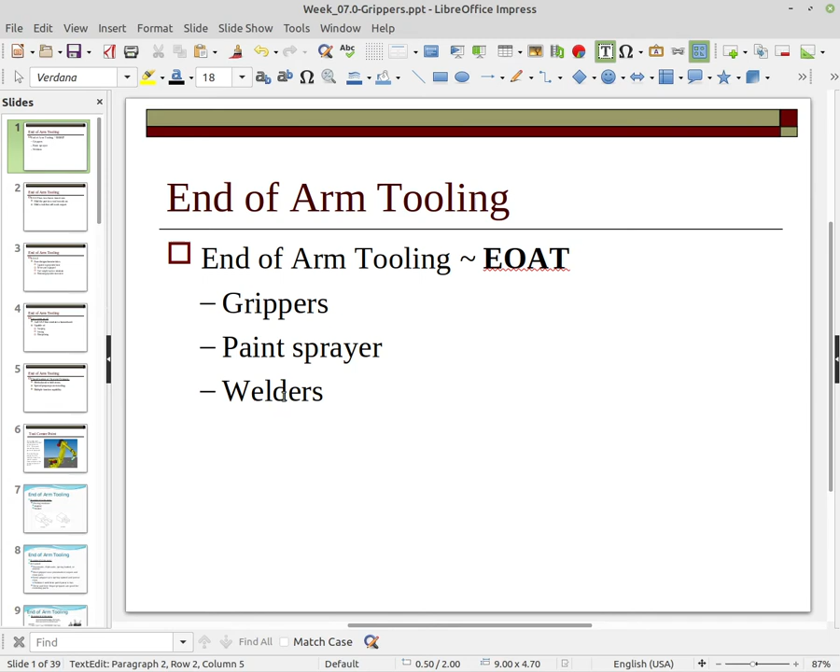This video discusses end-of-arm tooling, or EOAT. Some common types of end-of-arm tooling are grippers, paint sprayers, and welders or welding tips.

The end-of-arm tooling has two basic possible functions. On the one hand, it could hold a tool that is going to work on a part, or it can hold the part that some tool is going to work on. So if it's a welder, the end-of-arm tooling is going to be the welding tip, and it's going to be welding on a part or parts to weld the parts together.

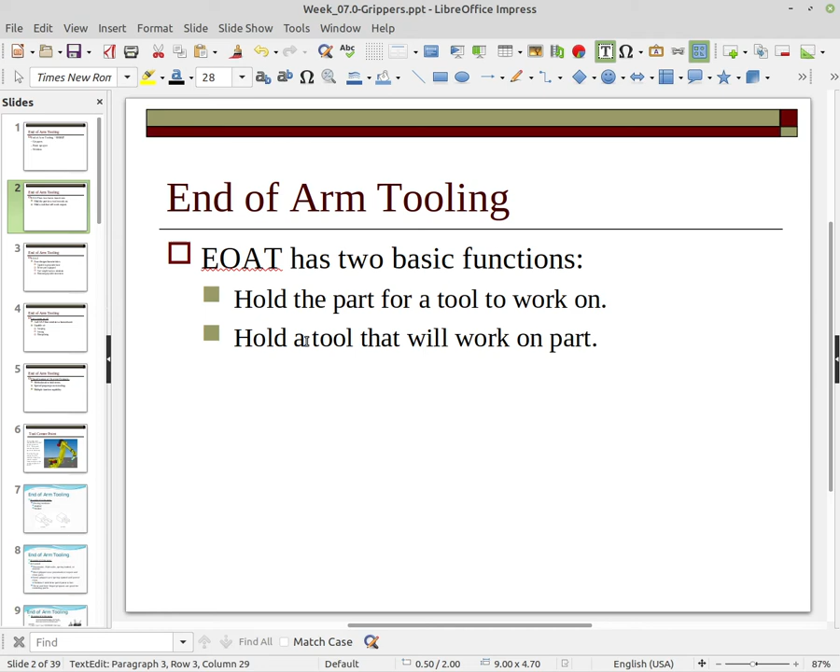In general, there are four different design characteristics that we use specifically for grippers when end-of-arm tooling is a gripper. Those are the capability to grip and release the object, to detect that the part has been gripped, to keep the weight of the tool as low as possible, and to maintain the grip of the object as we're moving. So when we're trying to build a gripper, these are four different characteristics that we would like to see.

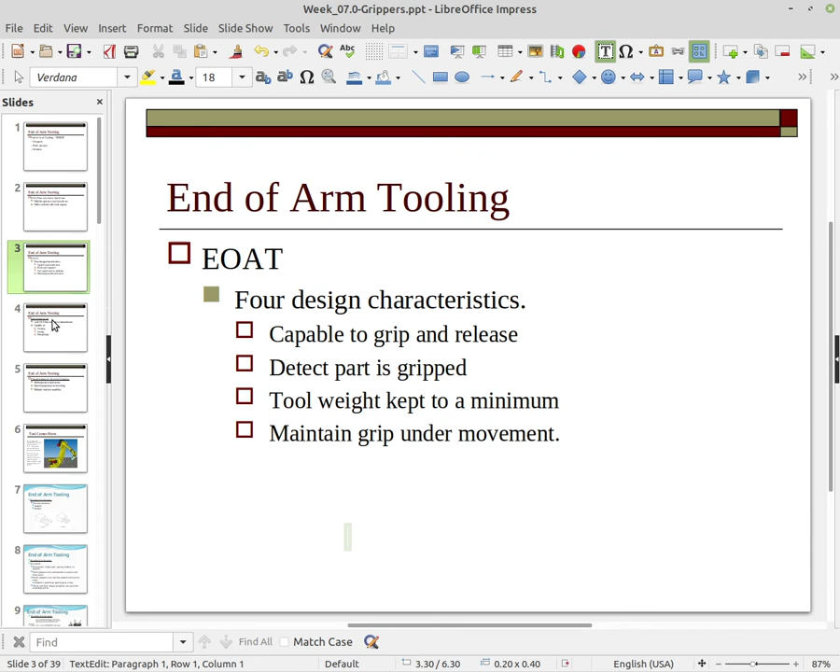Now, I'm not saying that every gripper meets these. I'm just saying these are design characteristics that we would like to build in there long term. Like if you're talking about a gripper especially, we want the end-of-arm tooling to simulate the human hand and all the capabilities you can do with the human hand, which of course is grasping things, but also sensing things and manipulating things.

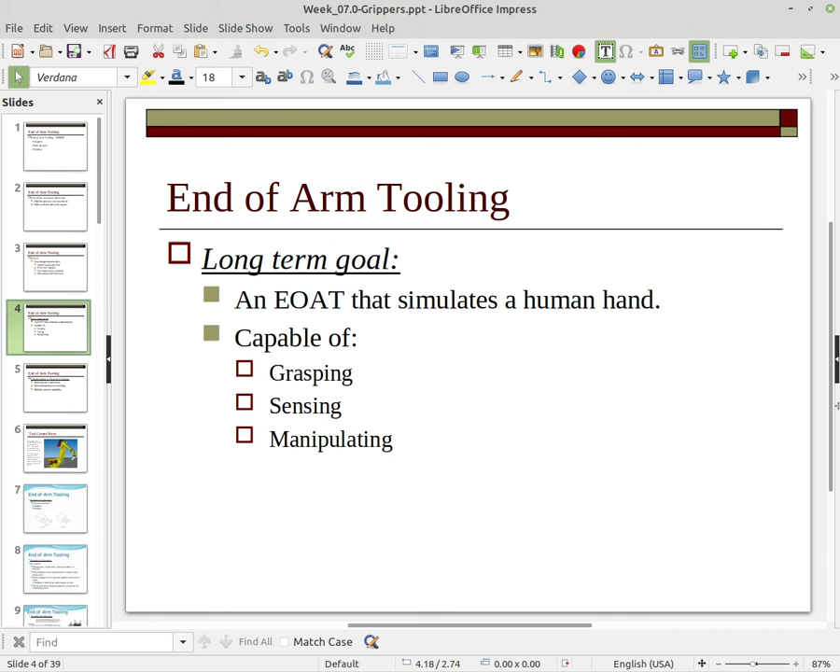So if we're trying to classify different types of grippers, we want to look at the method we're going to use to hold items, any special purpose toolings or sensors, and whether they have possibly multiple function capability.

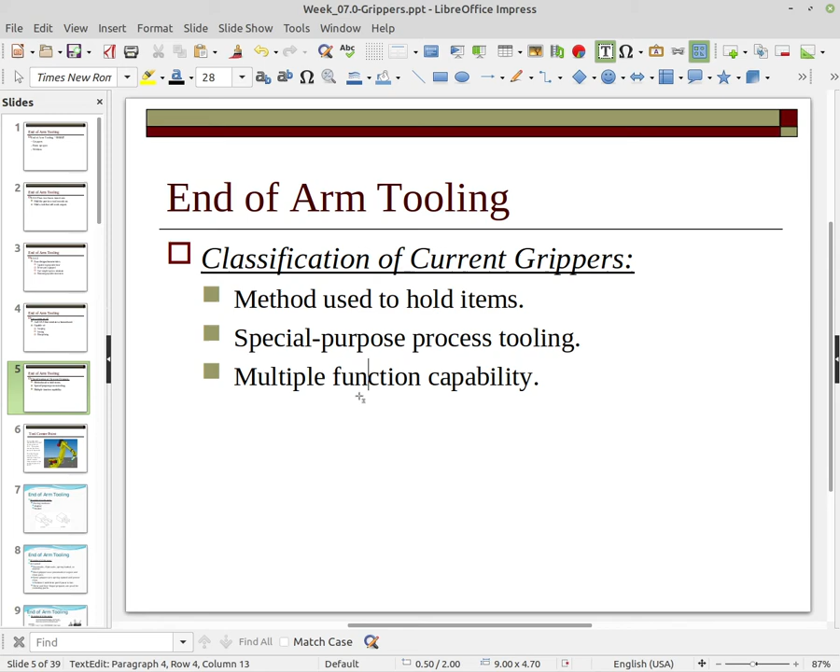So what we have to do is we have to teach what we call the tool center point, or TCP. The TCP is kind of the business point or the focal point of the tooling that we have on there. Basically what that does is it maps it back to the origin of the robot. The origin of the robot is where the center of the first axis and the center of the second axis cross, and where those two meet is called the origin of the world frame, which is kind of the robot's home.

So what the TCP does is it uses what's called a tool frame to define how far we are away from the faceplate. The faceplate is where we mount the tooling, and then the point in space we're trying to teach is mapped from the tool center point to, or from, the world center origin of the robot.

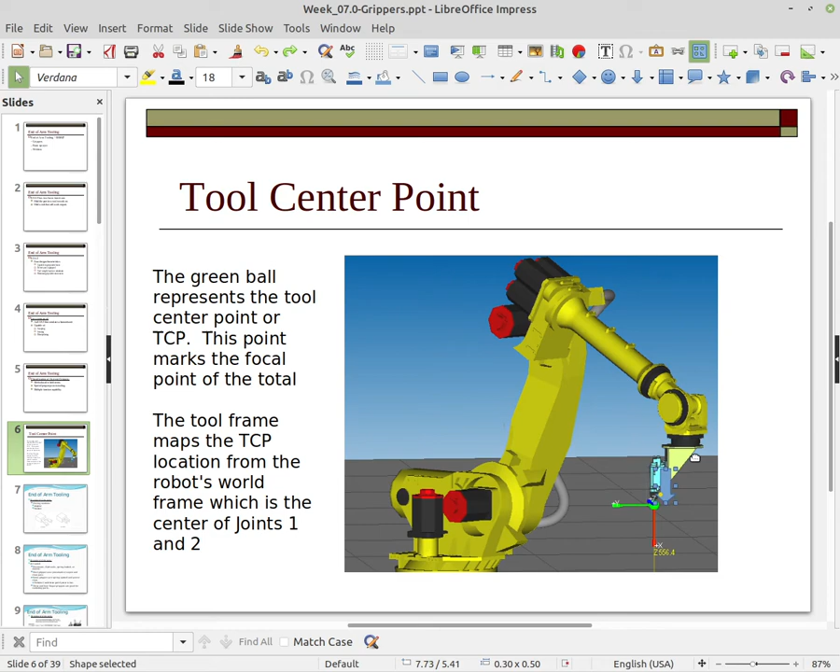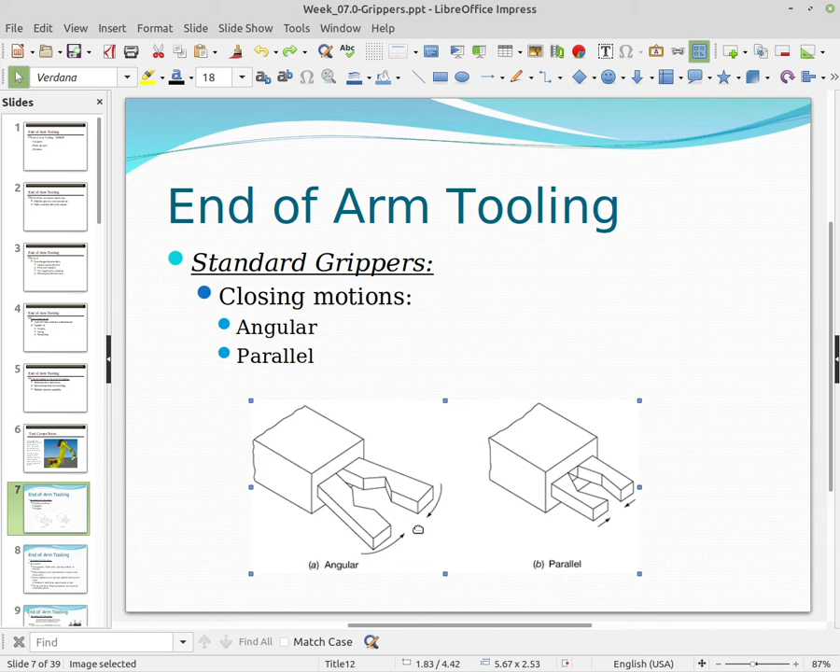So if that is an issue, you may have to consider that. Now to activate these grippers or toolings, we can either use pneumatic, very common, using some sort of air mechanism to activate it. We could use hydraulic if trying to pick up something larger, like heavy steel beams, for the strength. They could simply be spring loaded, activated by a spring that opens or closes when you attach it. Or they can be electrically activated.

So most of your standard finger grippers or vacuum grippers are going to just use pneumatics, compressed air, to operate the grippers. Some grippers might be closed by either a pneumatic or electric actuator, but then when you turn that actuator off, a spring will open it. And that can be a problem because, number one, if you lose power, the spring is just going to pop it open and it could drop or throw that part.

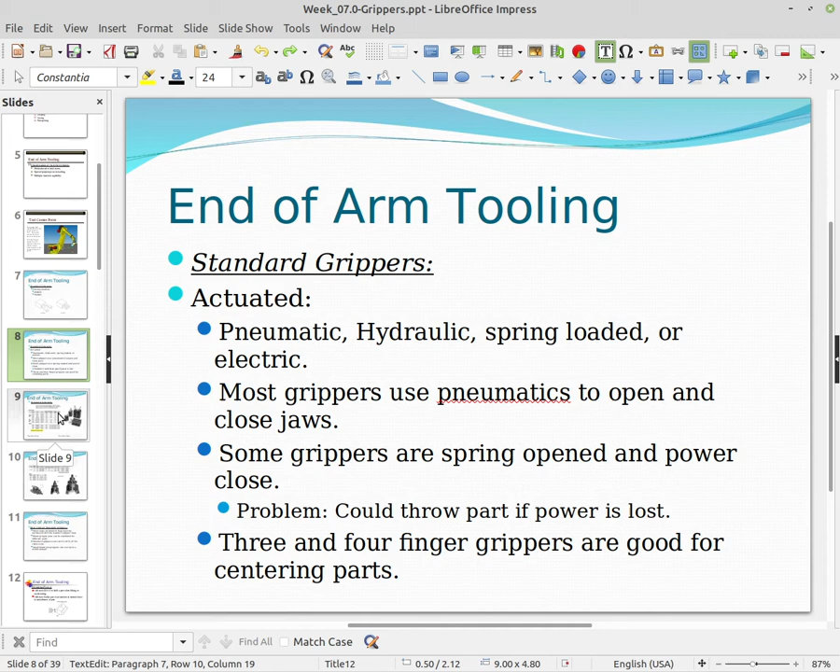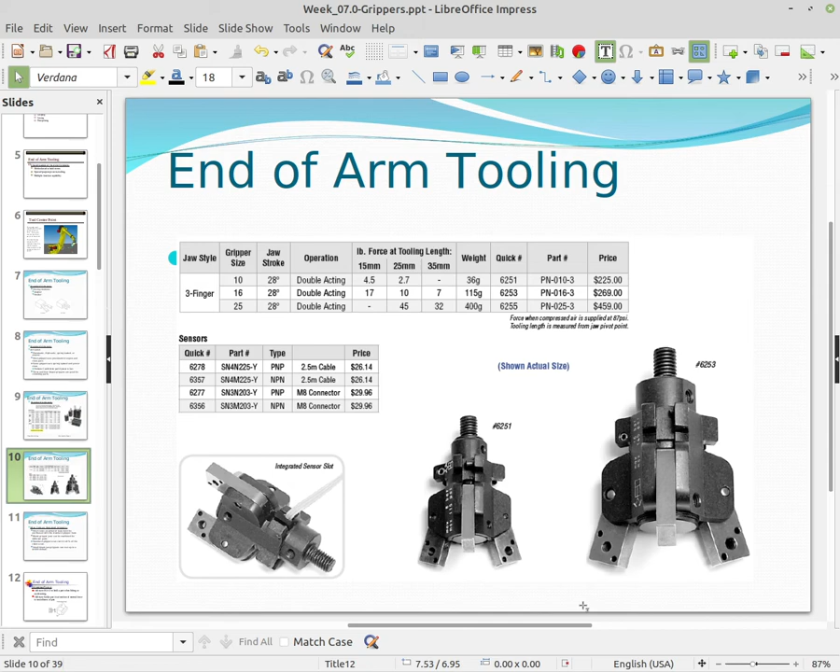Here's some common grippers. These are angular grippers, showing some of the stats when you're trying to find a part. This is a three-finger gripper with an angular kind of movement. You just put the fingers on there and it will center a part between the three fingers.

When you're purchasing a robot, you really can't forget about the end-of-arm tooling, because without it, the robot is really kind of useless. It's not uncommon for grippers to cost 4 to 8% of the total robot cost. When you're talking about a robot that is $40,000, 8%, or just say 10% of that, would be $4,000 for the gripper. So even some basic grippers can be very expensive.

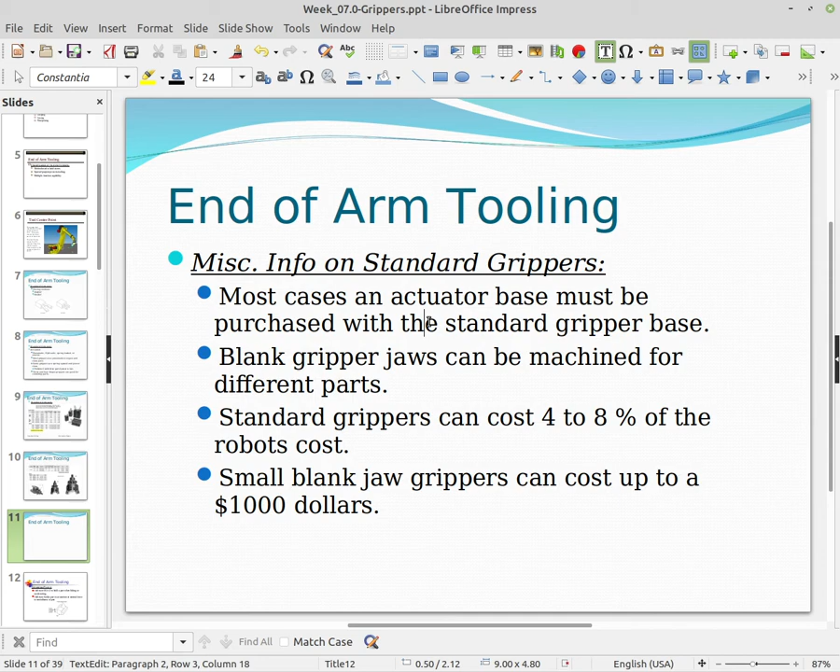Let's talk about gripping force. Remember, one of those things was that when you pick it up and start moving, you want to make sure that the part doesn't slide out or fall out as you're moving it. You're supposed to keep a hold of it. A large part of that is due to the friction of the part and the smoothness of the part.

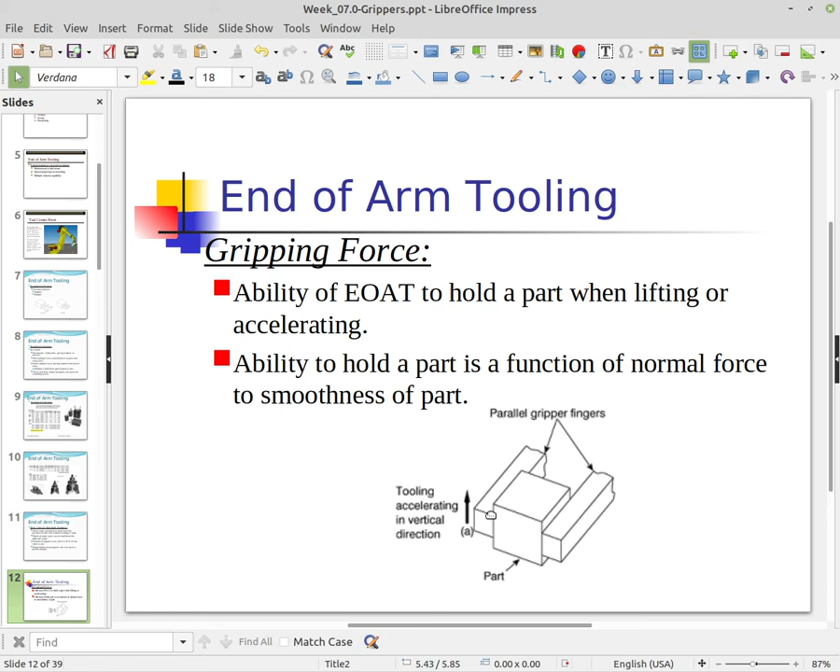Here we have a 2-finger gripper grabbing a part, making contact with both fingers. Keep that in mind as we look at the calculations. We have what's called a normal force, the force that's applied by the fingers when they're squeezing the part. Remember, if you're going to be lifting this part straight up, gravity's pulling it down.

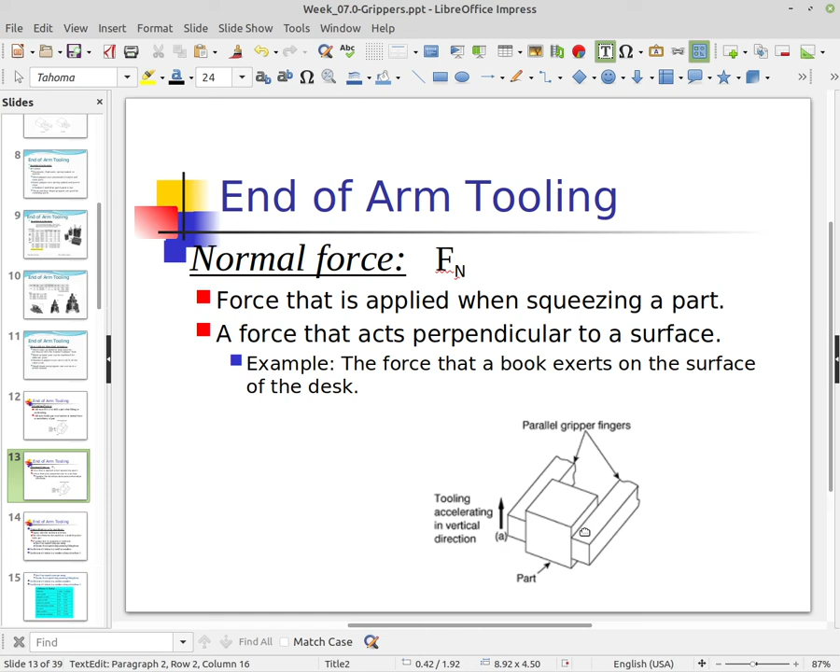One of the things we have to be concerned about is the smoothness of the surface of the part. If we're going to pick up a part, we don't want that to be smooth. So we have to look at the coefficient of friction, which is basically a measurement of how smooth or how slippery the part might be. This coefficient of friction is considered a unitless number that is always less than 1.

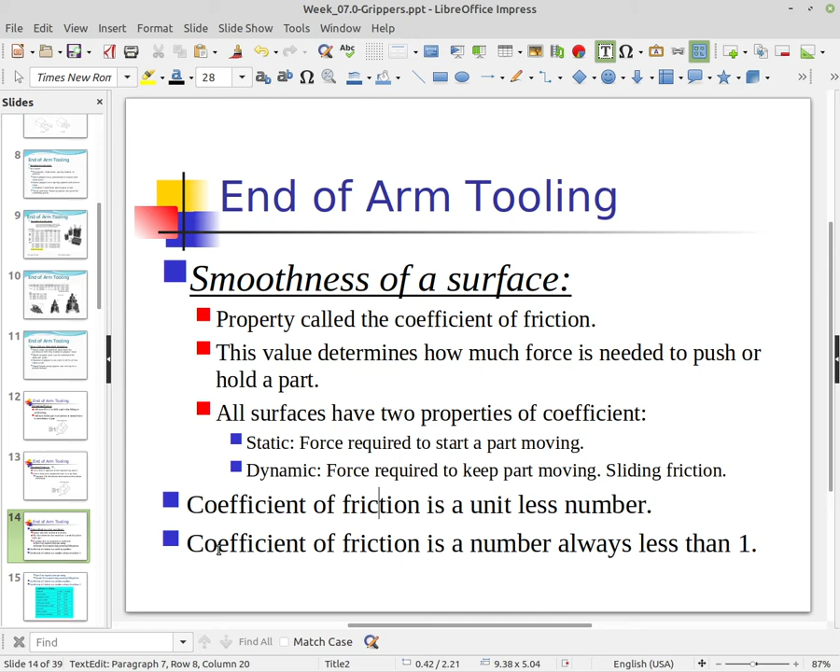Here's a little chart showing different types of material: steel on steel, aluminum on steel, copper on steel. Right here in the center, we have that value of 1 we were talking about. If you had a rubber finger on your gripper and tried to pick up a block of concrete, that gives you a coefficient of friction of 1, which is the best grip you could effectively get. If your coefficient of friction is 1, you're getting a good grip, because rubber is kind of soft and doesn't slip much, and concrete is porous with a really rough surface, so you can really get a good grab.

However, when you look at this chart, there are two terms: a static coefficient of friction and a kinetic one. The static term refers to when you're not actually moving the arm, just holding the object. When you actually try to move, your coefficient of friction is going to drop. So even though you may have a good grip when sitting there holding it, as you start moving, especially if you try to move the arm fast, there's an increased chance the part will fall out.

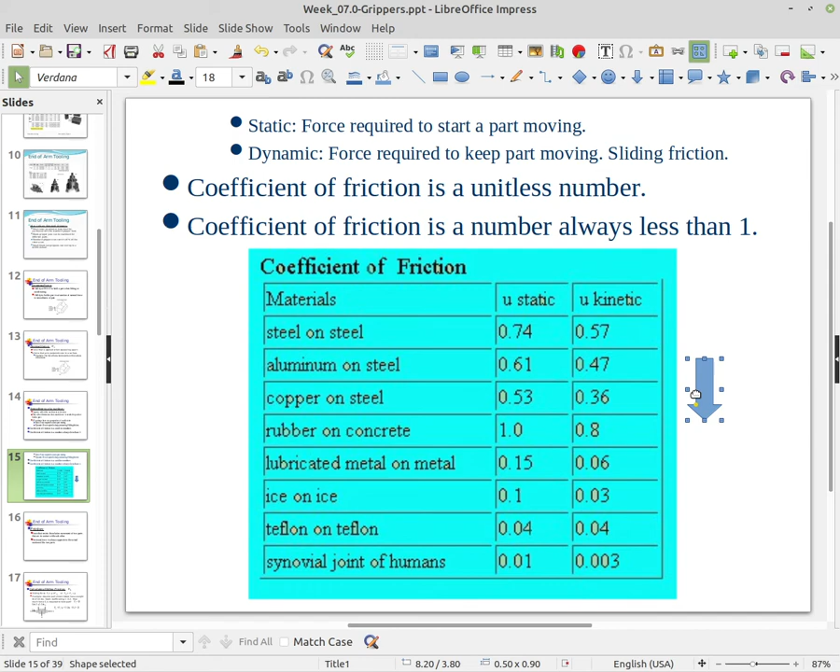So in this example, I have a weight which is 10 pounds. I'm going to try to lift this 10-pound piece, which means I'm going to have a force. Now, since I've got two fingers, I can split that, right? I'm going to have force over here, and force over here. So I really need basically 5 pounds of force on both sides pushing up to lift the part. But if we use a coefficient of friction of 0.2, and we have 5 pounds of force going up, my normal force is going to have to be 25. So I'm going to have to press in with 25 pounds of force to generate 5 pounds of force on each side to lift this 10-pound weight.

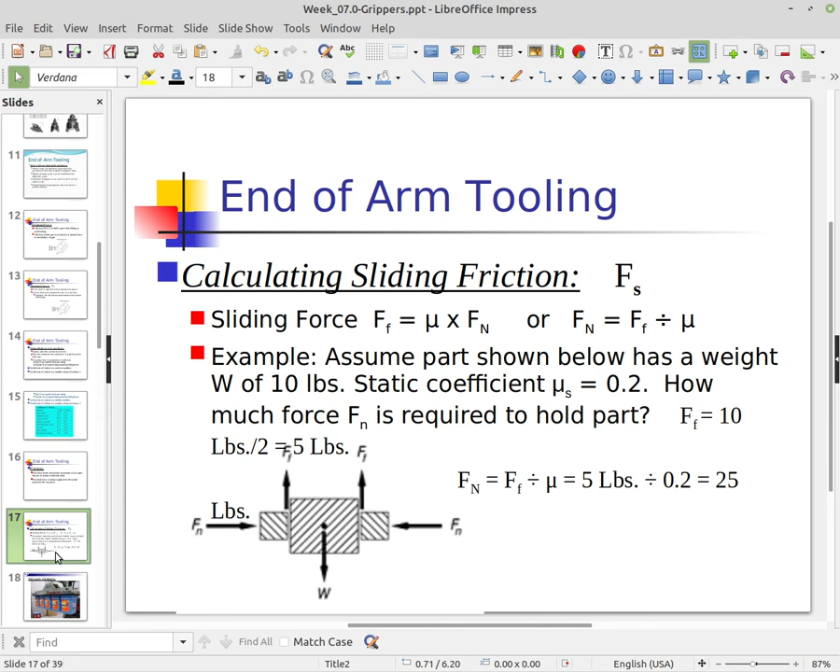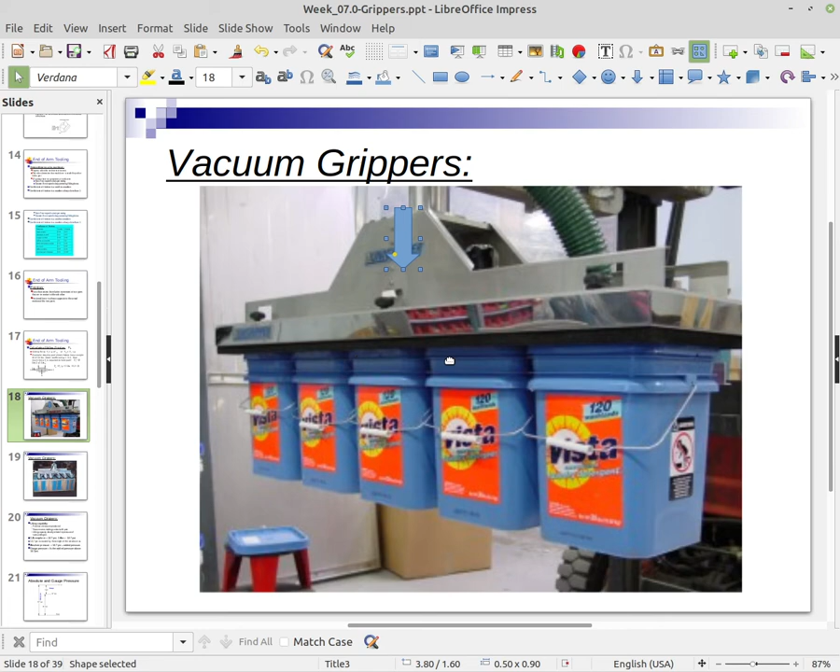All right, so this particular robot is using vacuum suction cups basically underneath of the gripper here. We can't really see the suction cups in this, but it's using suction cups to pick those up.

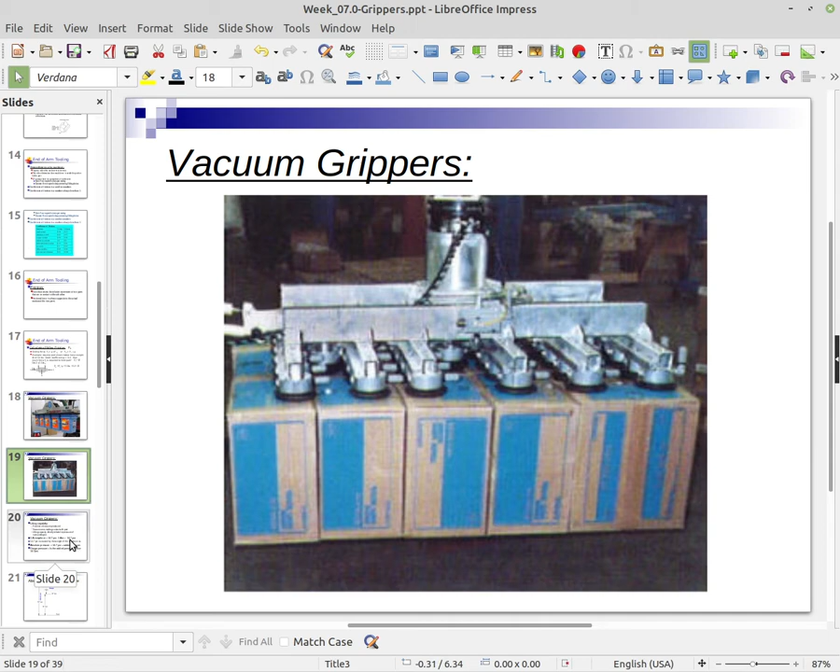Here's kind of a different example where we have lots of different suction cups and we're picking up a whole bunch. It looks like 1, 2, 3, 4, 5, 5 or 6 boxes here. I guess it must be 6 rows of boxes, and it looks like maybe 3 in the other direction, so about 18 boxes here simultaneously that we're trying to pick up. So we've got a lot of different suction vacuum grippers.

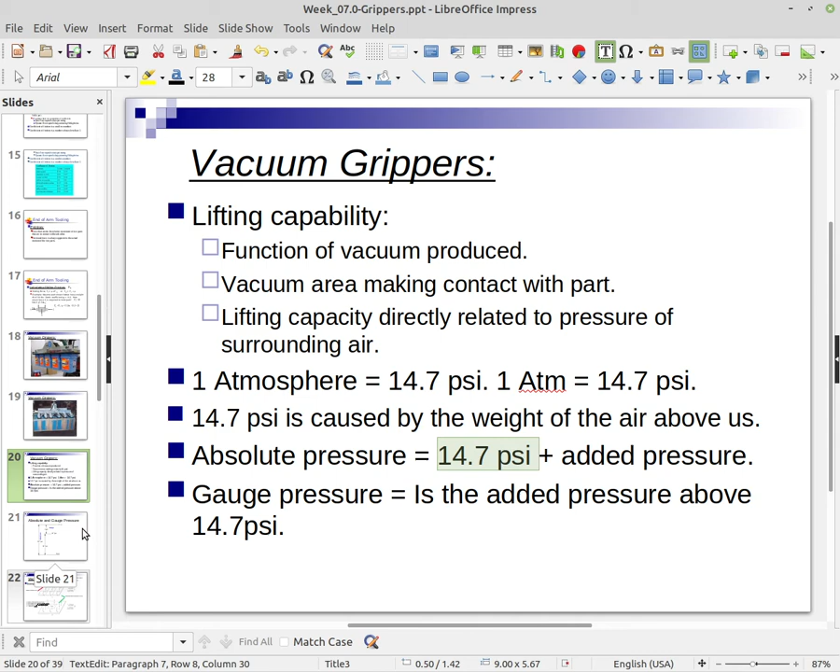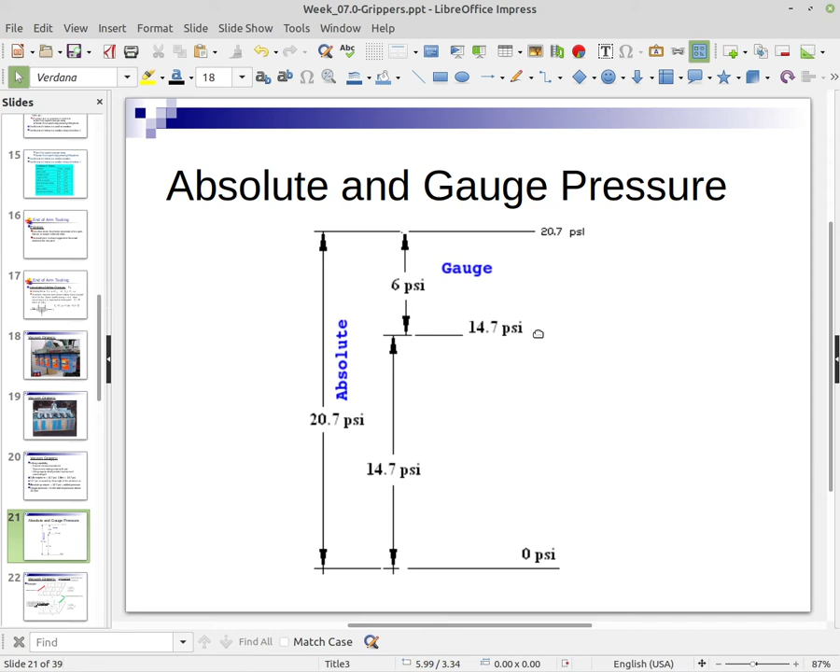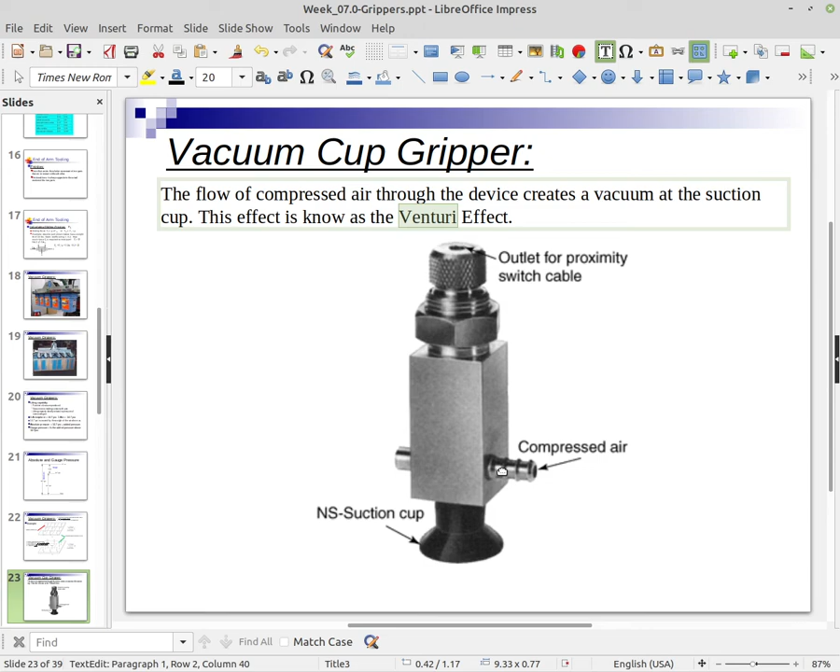What happens then is inside of that gripper, there's kind of a constrained neck area here. As we push this air through from left to right, when it gets down here, it gets compressed and has to move faster. What that does is cause the vacuum right here - that's where we get that vacuum. Now, again, this vacuum is nowhere near 0 psi, it's simply less than the atmospheric pressure.

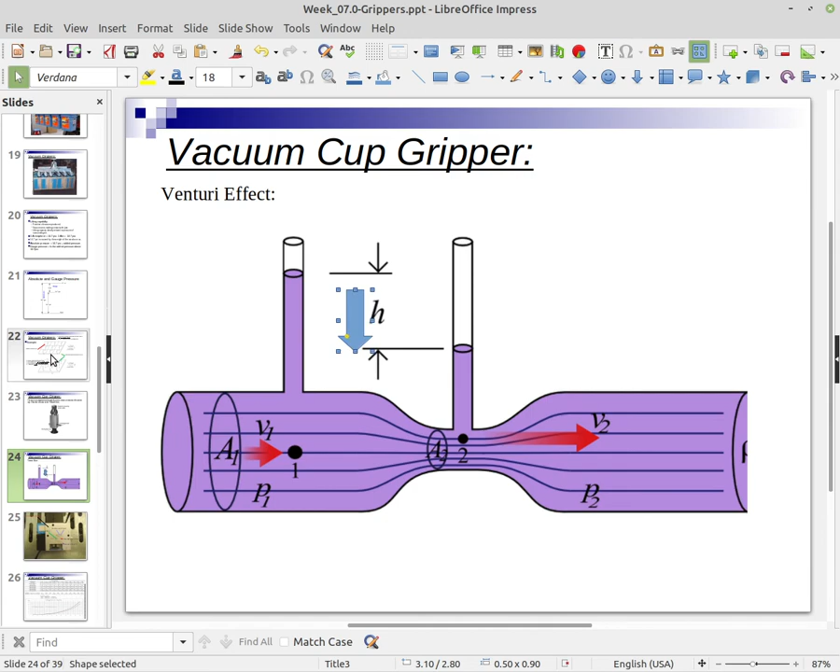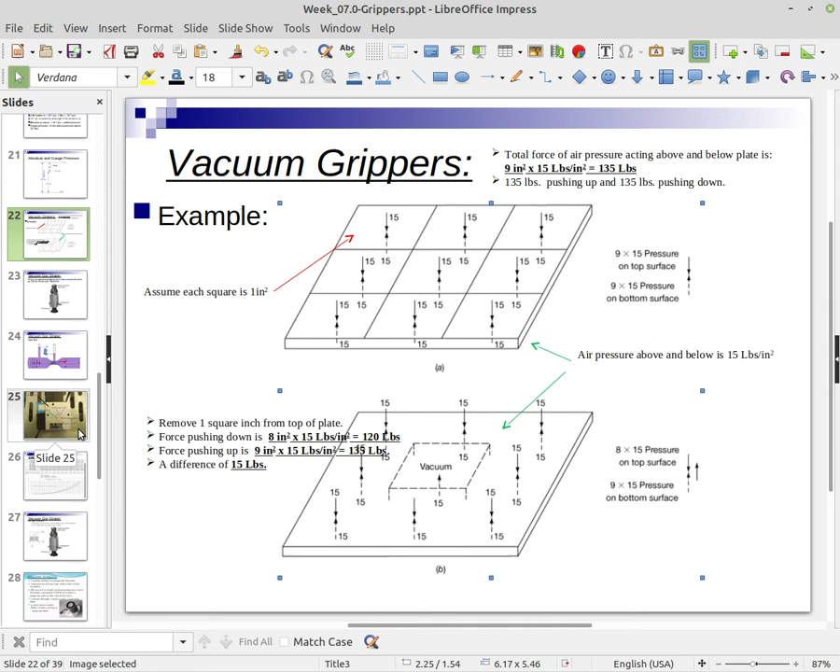So like in the example I just did up here, that's assuming we were actually able to create a perfect vacuum underneath of this center square inch section of the plate. But in reality, we're not going to get anywhere near that, so we wouldn't be able to lift a full 15 pounds.

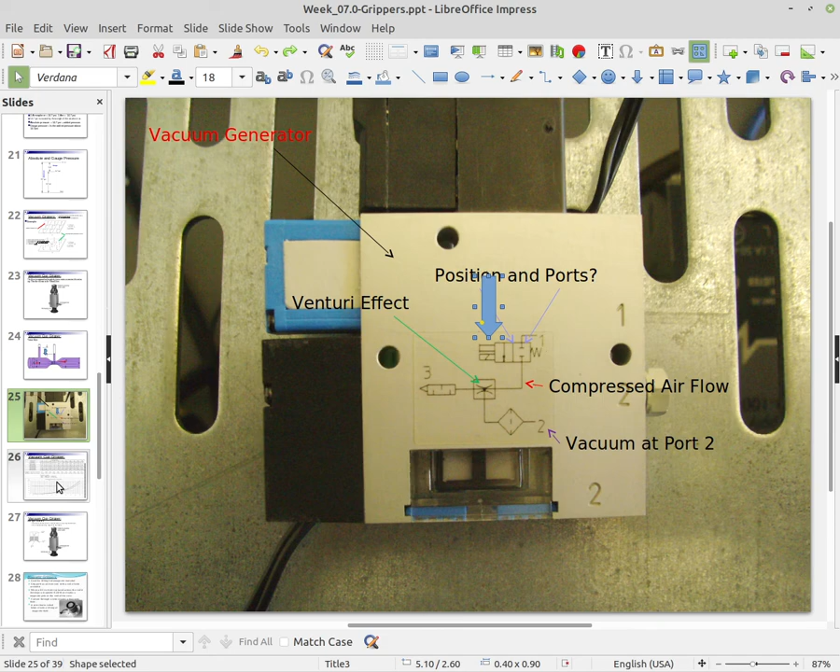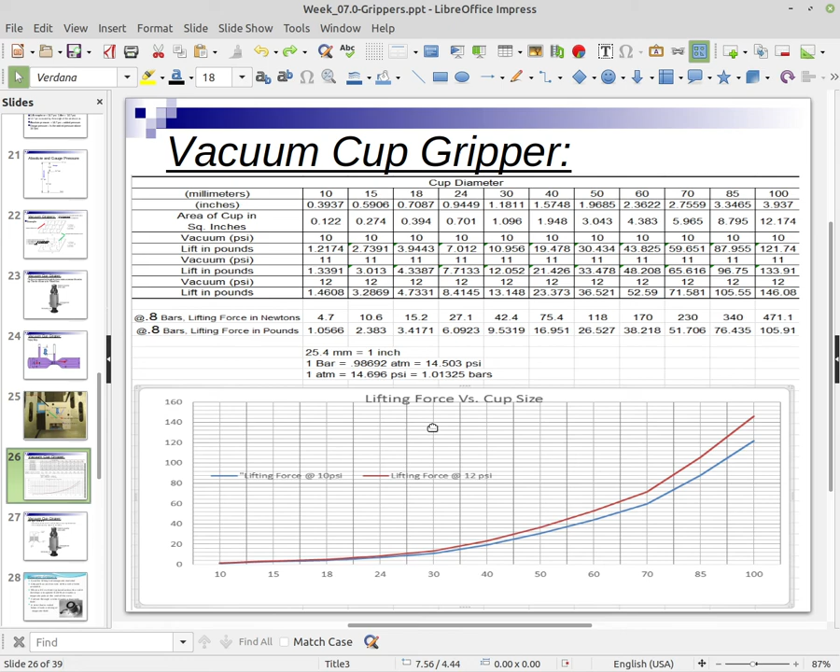So when we're trying to get a lifting force, as we increase the suction cup size, we can obviously increase how much coverage and how much vacuum we're creating, and therefore lift more. That's all this chart is showing.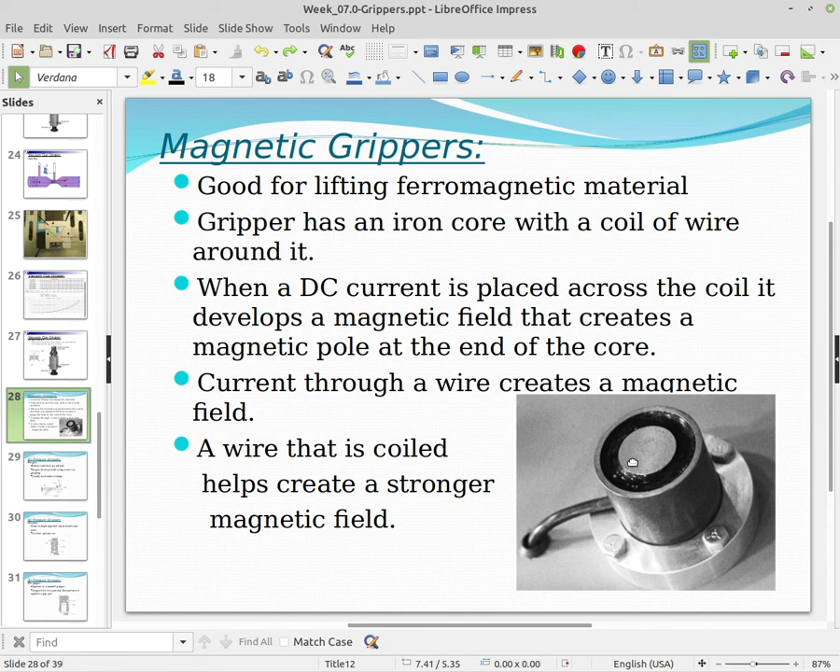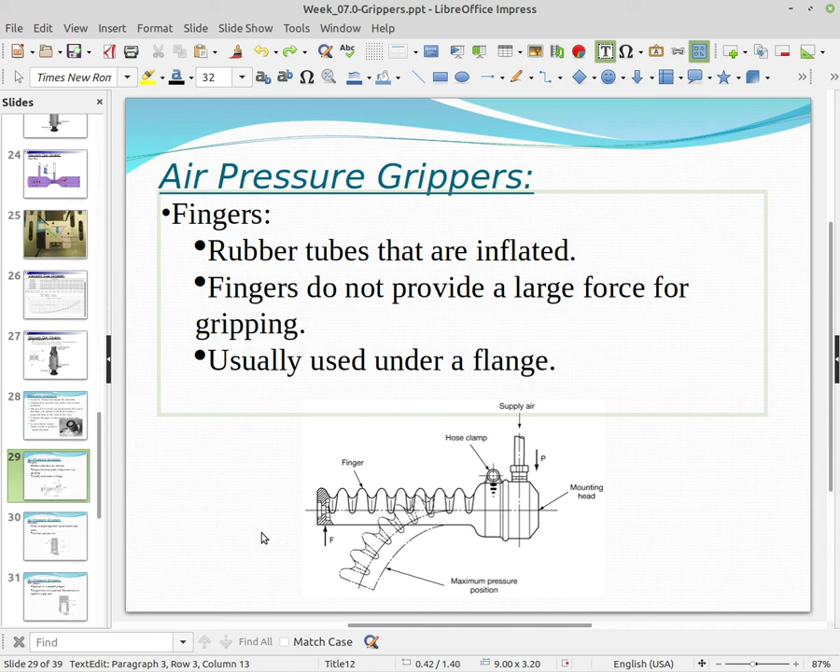All right, here's an example of some rubber fingers that work by basically inflating them. So if you inflate them, you can get them to actually move and kind of move almost like an actual human finger. Not quite, but along that shape.

All right, so this gripper here is called a mandrel. The idea is we push the gripper down inside of a cylinder, and then we have a rubber diaphragm, and we fill the rubber diaphragm with air, and it expands out and makes contact with this cylinder, and then we can lift this up. This gives you, number one, you're using a rubber diaphragm, so you're going to have pretty good friction with that, and you have a 360 degree grab around this cylinder, so this actually gives you a really good hold.

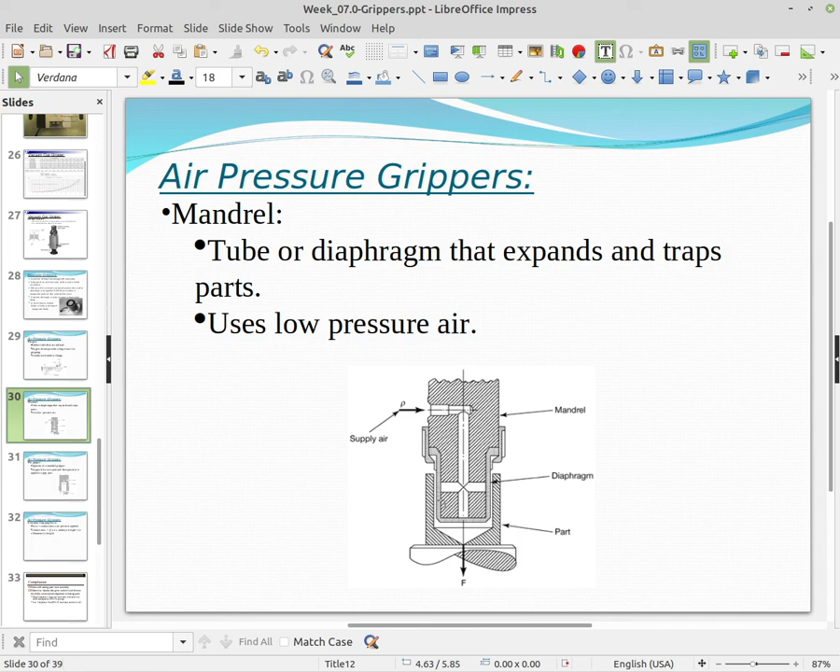All right, now the opposite of that is what's called a pin gripper. In this case, we're trying to pick up the pin, and we're putting the cylinder down over top of the pin, and then again we've got the rubber diaphragm in here, and we fill that full of air, and it makes contact all the way around this cylinder on this part, and again it gives a really nice grip.

So when you're trying to calculate your gripping force there, you need to remember that the area, since it's a circular area, we have to look at the circumference, which is 2 times pi times the radius of the cylinder, and then multiply that times the height, and that'll give us the total contact area that we're grabbing.

All right, now another term that we have to consider when we're trying to pick up parts is something called compliance. Compliance talks about, well, if I'm going to move down and pick up something, what happens if I'm not perfectly aligned? So like when we're coming down here and we're trying to put this cylinder over top of this pin sticking up, what happens if we're off a little bit?

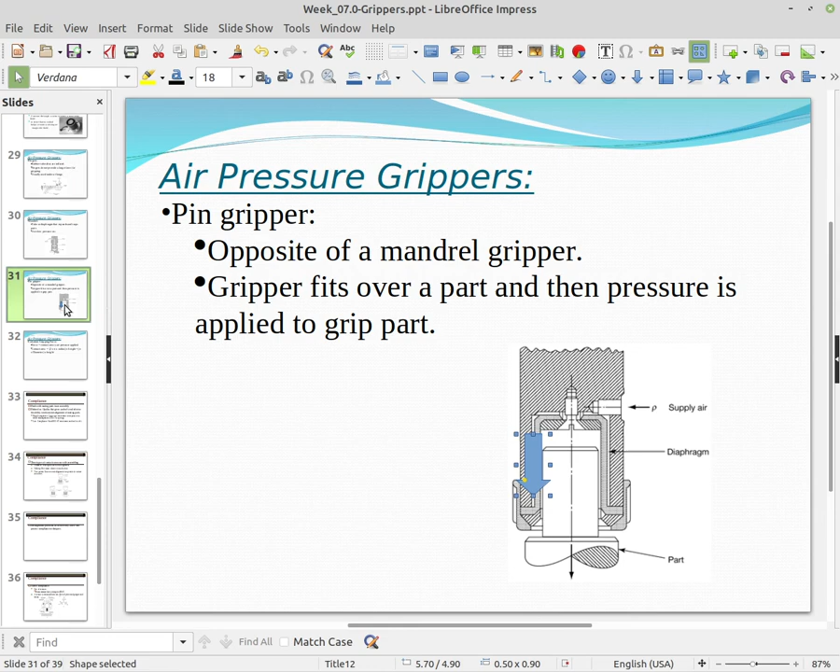Well, if you look at the drawing here, down here at the tip, so when it first starts going in, you can see there's a little angle here, or chamfer. And also on the part itself, it has a chamfer. The idea there is that makes it a little bit easier. So if you're off just a little bit as you're coming down, that'll help allow it to shift a little bit so that it can move down and come across the part like it should. That's what we're talking about, compliance. So using a chamfer like that is considered passive compliance.

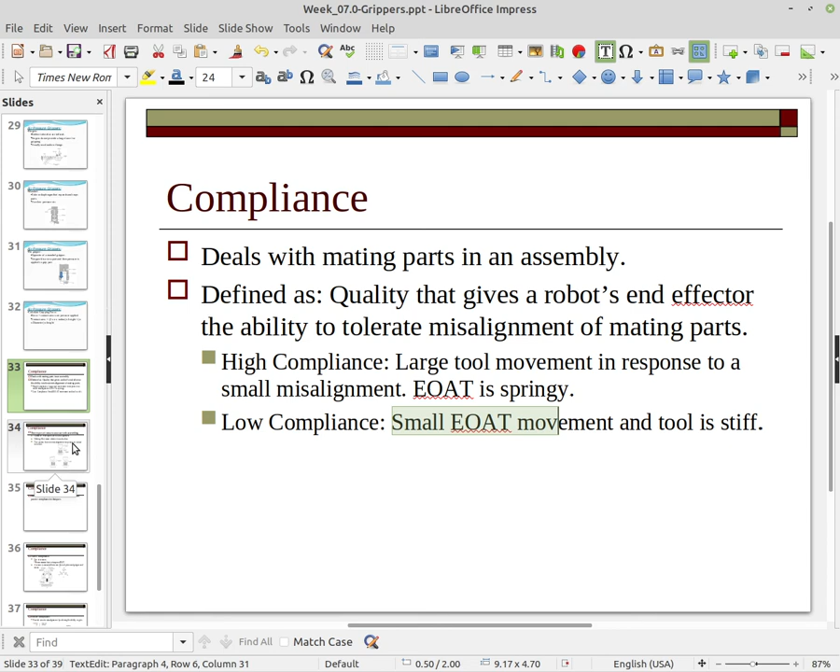All right, so you can have very high compliance, which means that the tool has a lot of movement in it, so it has a lot of flexibility. A lot of times it's like vacuum grippers especially, they're made out of a rubber material that's going to be springy, and so they tend to have quite a bit of compliance. If you're using metal finger grippers, they tend to have very small, very low compliance because they're real stiff and they don't move. So you've got to have your parts lined up within the gripper very nicely.

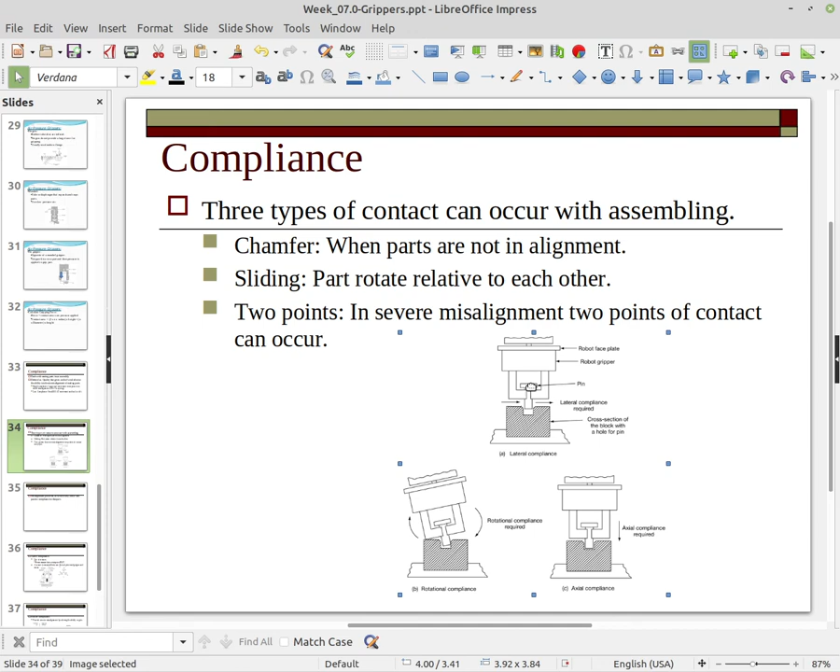Now, here is a couple of different types of issues that we can run into. So the part is that we want to come straight down into this hole with this part, but if it's not lining up quite correctly, we could run into two things. Number one, we could be off left or right, and the other is that we may need to rotate.

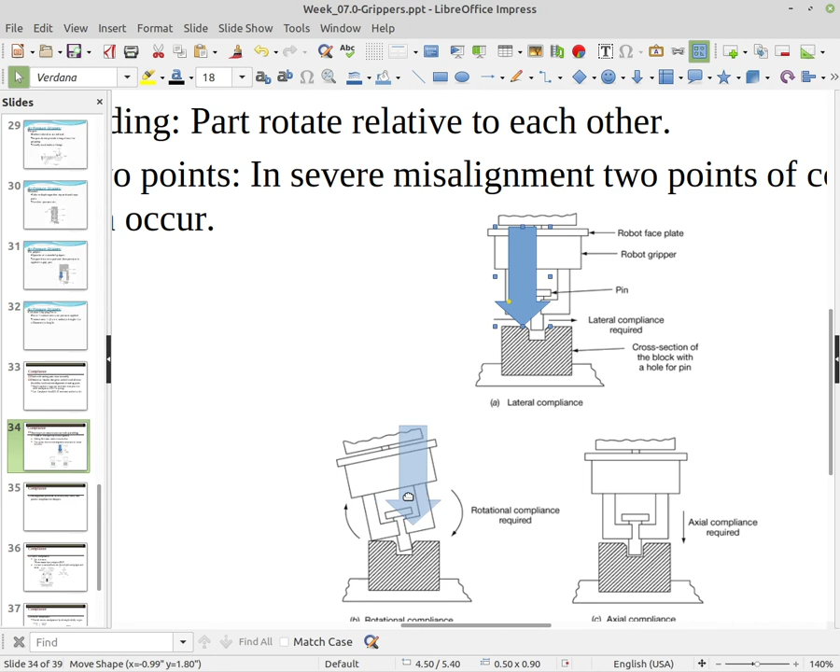See, now there's a chamfer on here. If you look at this part, right, you see that part has been chamfered right along that hole, so that if you're off a little bit, it gives it the ability to slide down in. The only problem is when it starts sliding down, now it might actually go in at an angle. So now it's not going straight down because it gave and it bent over a little bit.

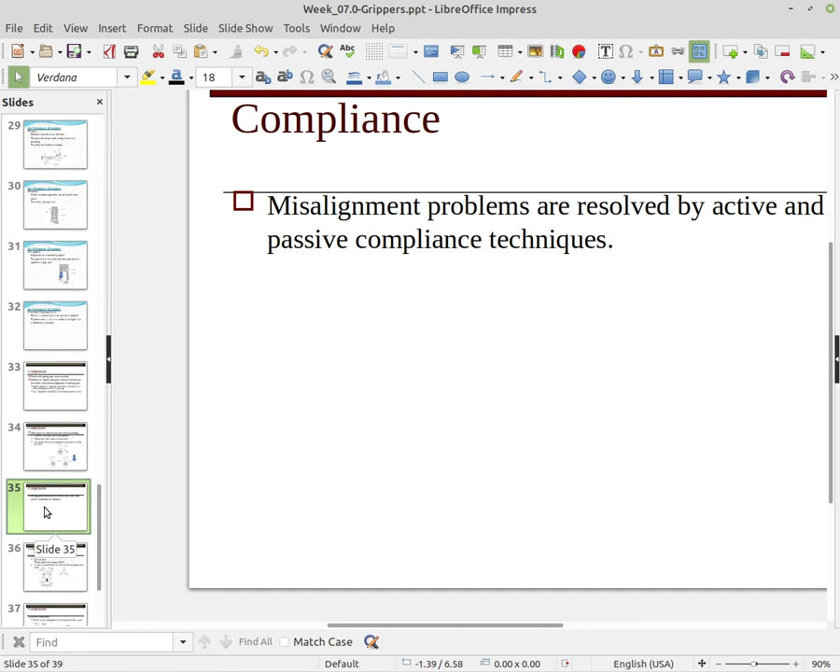So what this particular gripper allows us to do is it gives us both rotational compliance, so it'll let it rotate, but then it also will let it shift over. Let me grab my gripper here. This particular gripper has been designed so that it can rotate over and in, but then shift laterally so that the part actually ends up coming straight down as it should.

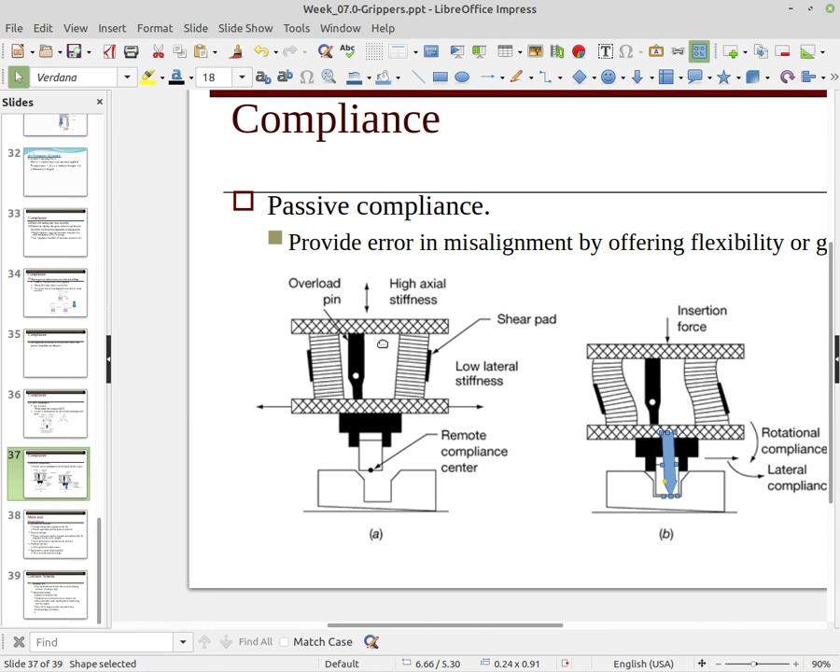All right, so that's passive compliance. You have to build your gripper to allow it to line up if your program is not quite properly lined up. Now, active compliance, on the other hand, uses sensors.

We have to mount sensors on here so that we can tell when it starts hitting that part, that there's forces or torques being applied. Active compliance is pretty expensive because these sorts of three-dimensional force and torque sensors get kind of expensive. But if you need it, then they are available.

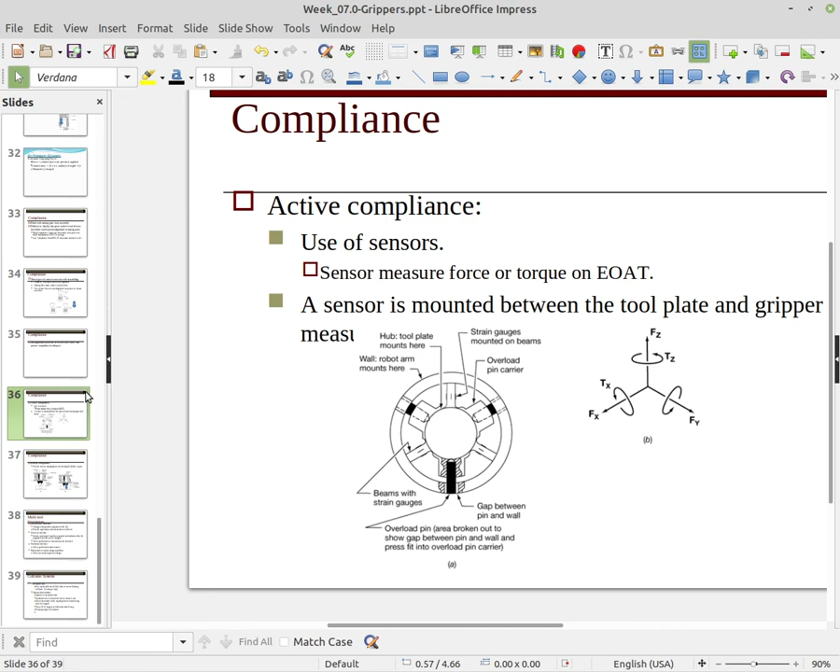What it can do is feed back into the controller and tell the controller what direction to move to line it up, and that's why it's active. You have a sensor recording forces as you're trying to force the part down in there, and it's not quite lined up. Then you feed back these torques in the X, Y, or Z direction, and also any forces in the X, Y, Z direction, and the controller will have to make adjustments to move the arm until it does line up.

Here we're going to discuss the wrist interface. When you talk about the wrist, that's basically where we're mounting to the faceplate, so that's our mounting point. There's a mechanical interface there that you're going to bolt your gripper to the faceplate. But sometimes on certain applications we want to be able to change the tool very quickly, and there are a lot of different mechanical designs made to allow the robot to change its gripper without a human being present to unscrew the old gripper and screw in the other one.

We also have to have an electrical interface on the robot so that we can activate the control and also any sensors, if we have sensors on our grippers to detect whether the part's actually there or not.

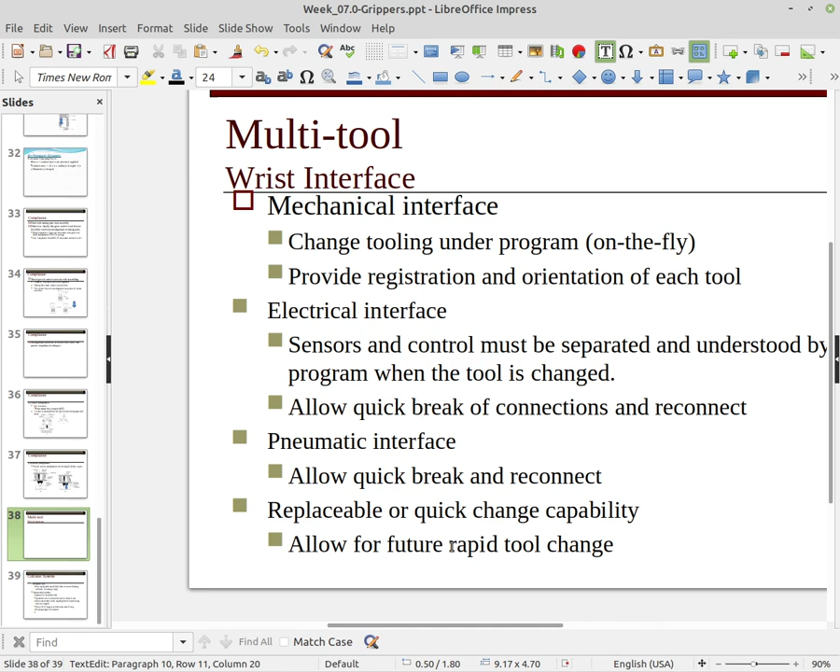Pneumatic interfaces are very nice because they have a quick break and reconnect, so it's pretty easy to connect or disconnect the air hose. Also, if it leaks a little bit, it's not going to cause damage like a hydraulic line leak would. In a lot of newer applications especially, we're looking for very rapid tool changes to be able to change our various tooling.

Now we also have to consider collision systems. As we're going down to pick something up, if we're not in line or an object's in the way, what happens? One of the common things we do is build in something called a breakable link. You've probably heard the old adage that a chain is only as strong as its weakest link. The point is that we build in a weak link so that if something does happen, it can break that link and not cause too much damage.

So the idea is that we have something that's relatively cheap and easy to replace to prevent damaging something that's much more expensive and would cause a lot more downtime and cost to replace or repair.

There's also a lot of newer robots that actually use various software collision detection techniques to prevent any danger.